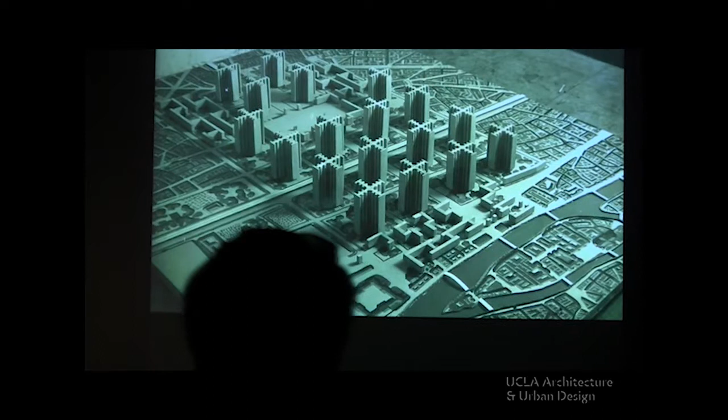This is a project made by Le Corbusier, very young, for Paris. It was a brutal proposal, super provocative, and an attempt to overpass the ideas Americans were dealing with in those days, trying to introduce some kind of rationality to the, let's say, unrational development of Chicago and New York and other cities. It was really a very young, almost fascist project—not a project, a beautiful one, but almost fascist in its brutal destruction of some of the most important areas of the old city of Paris.

I just want to contrast this with this other image, a sketch made by Le Corbusier 30 years later, in his maturity, when he became more interested in exploring the idea of interior space, and exploring the idea of excavating architecture instead of flying. In the first period of his life, he was obsessed with the object—the idea of, let's say, an assemblage, a Fordist production of the skyscraper, and the idea of floating in space with the pilotis, and all this almost tectonic development in the first part of his career.

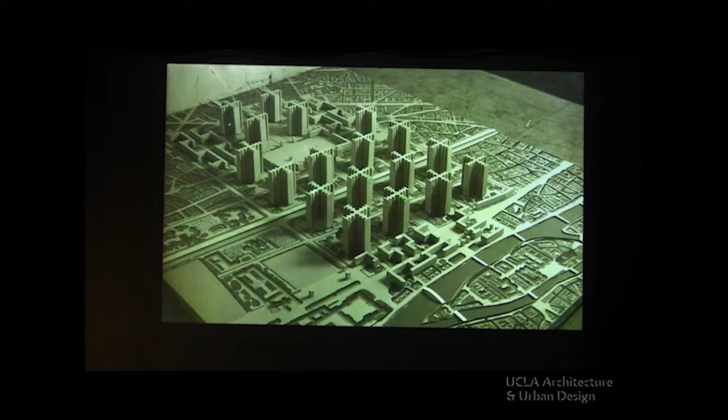From this moment on, he became more and more interested in the sculptural. He was very fascinated with the idea of dark interiors, organic materiality, concrete, the soleil, the brutalist use of concrete, etc. I mean, all of us know this story, but it's very clear, and it's something happening with many architects: they begin to fly, like Icarus, when they're young, wanting to make lighter things, and then at some moment they stop and begin to negotiate with the earth. This is just the first frame of the lecture.

The other frame concerns the texts I've been dealing with, some made with Renata, some translated into Spanish and English, some not, that in a way describe the trajectory we've been dealing with—analyzing modernism from three different perspectives. The Tower and Office book dealt with the technical heritage of modernity. The Good Life was more about the heritage of modernity in relation to private space, and the relationship between space and time, space and philosophy—how ideas affect the way we understand space, and the space of infinity. Atlas Pintoresco, which is not translated, was an attempt to deal with the idea of nature in relation to modernist projects. So these three books compose a kind of big survey of our heritage, and how we can deal with it from a cultural perspective that is more focused on the present and the future than on the past.

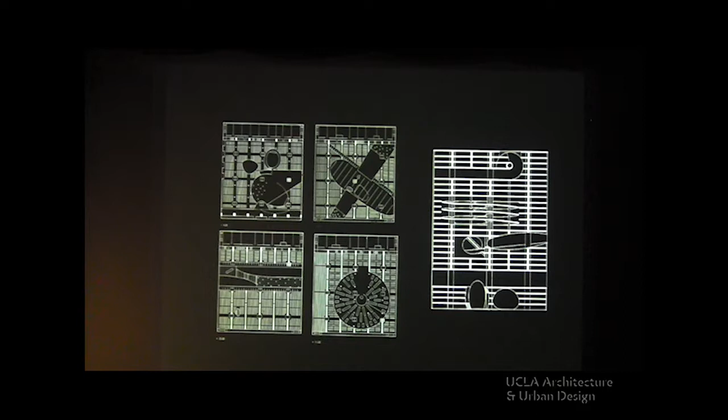With this, I just wanted to bring this discussion that at the same time introduces some tectonic ideas and aesthetic ideas. So I begin with the first project we made together, Renata and I - she will be speaking later, now it's my turn - and a competition that obviously we knew we were not going to win, and that we didn't believe had any sense to compete for winning.

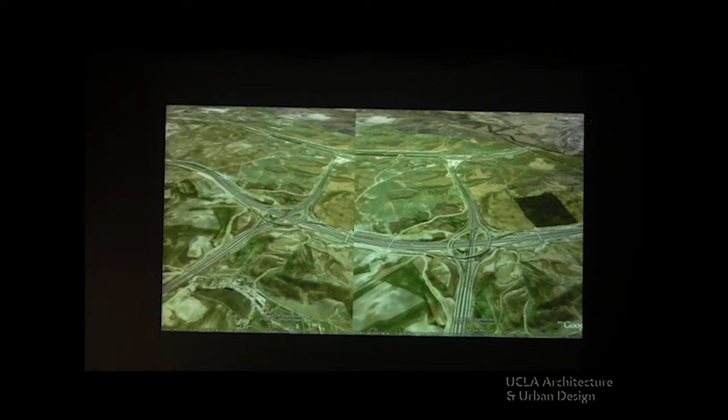It was in this unbelievable place in the surroundings of Madrid that has nothing at all, and they wanted to create a convention center and a hotel that could become an attraction for everyone. And we just began to work very intuitively, just for the pleasure of drawing, I would say.

With the idea of combining a set of very standard towers and a massive, let's say, elevated grotto - I don't know, excavated potato, I don't know exactly what. But we knew it had to be massive, and the other thing had to be fragile, crystalline. And in a way, there was a basic need to draw.

A very basic idea that thermodynamism, in a way, introduced a diversity of materiality into the project, in the sense that once you think in terms of energy, you always need some parts that collect or store heat gains, and other parts that capture energy and negotiate instantly with the climatic changes. So in a way it was a metaphor of a new materialism that combined the crystalline surface of the prism with the organic potato thing.

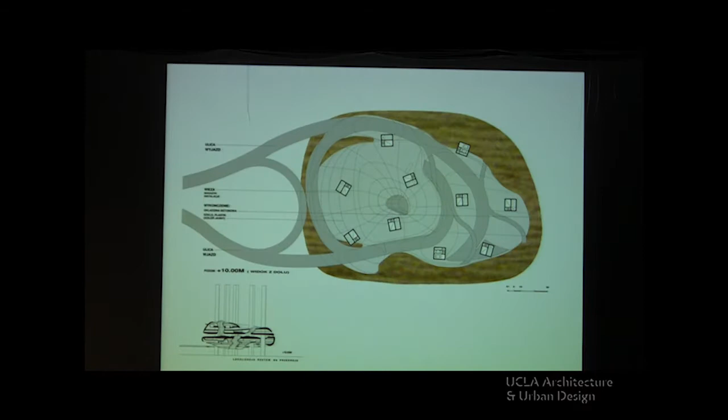And then here, without any idea of the picturesque, the growth, etc., just for fun, we began to think and to draw this. I will run it as in a flipbook in different ways.

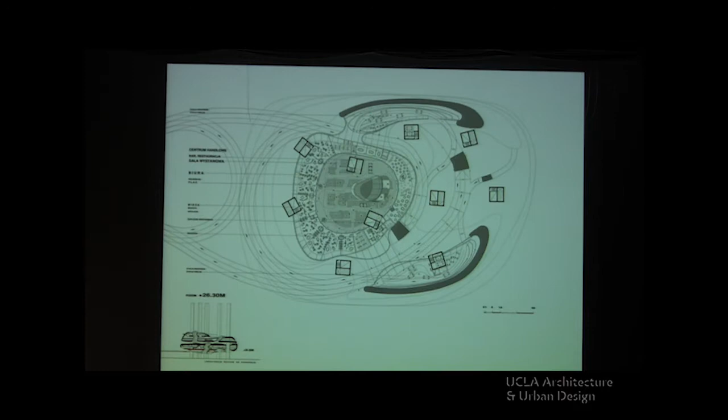Obviously the access was by car, and then there was a kind of labyrinth of movement and a kind of ballet, choreography, where you could find some cultural centers, some leisure centers, car park, obviously, some archives, cinemas, and then in the middle of the potato shape we had a real park that collected sand and water and had a kind of connection, an outlook space, a connection with the surroundings.

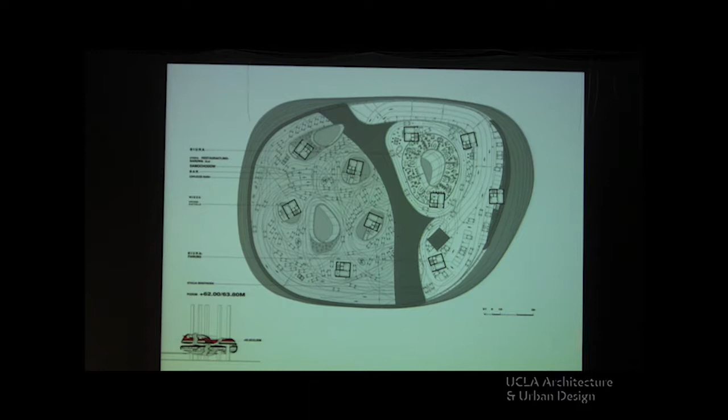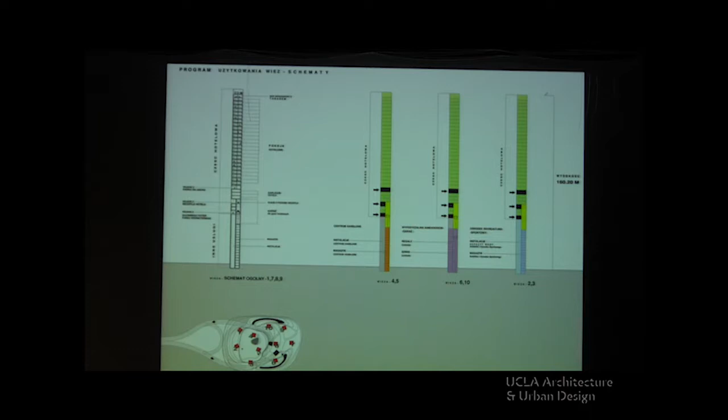And then we jumped into the upper part. More cars, more buildings, more cars, more potato. There was obviously a tectonic, complementary relationship. The towers were supporting, and the towers had just one room every floor. The lower part was for storing different materials, and the upper were the rooms, done carefully, trying to extract the most pleasant spaces for just one room in a very small space.

And that's it. This is our first project.

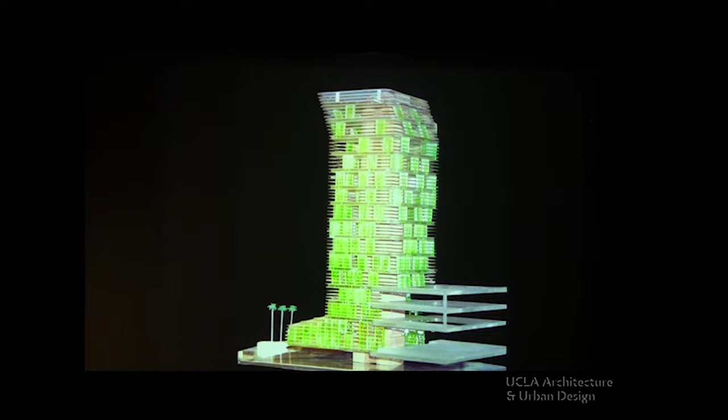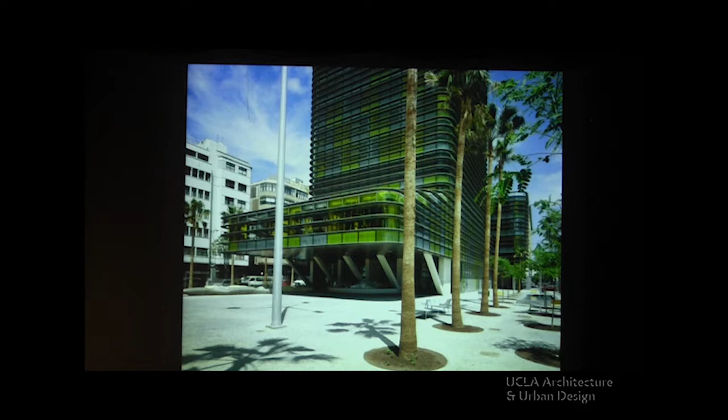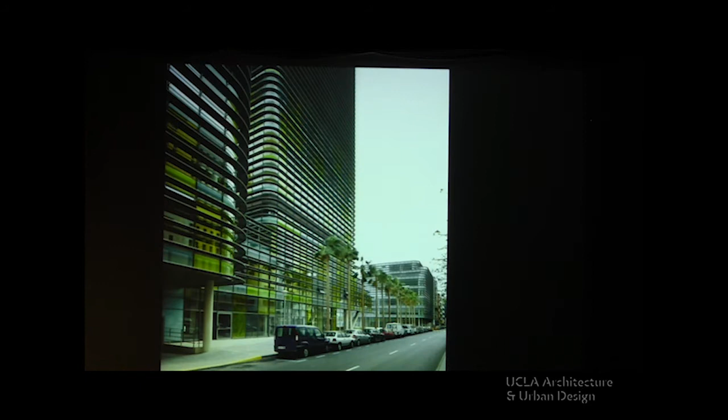Then we had the opportunity at Ábalos and Herreros, as Renata was an associate there from the first year, to draw some fragments of this idea, like this tower that was a kind of mixed use, that negotiated with the urban real built in Canary Islands, a combination of different programs, but at the same time wanted to jump and relate itself with the surrounding volcanoes, not with the surrounding urban fabric, but with a more topographical or geographical relationship. I mean, to hide the real scale into a super redundant display that changes the scale of the surfaces and negotiated with sand with this kind of scaleless device.

Here you can see more or less this relationship with the beautiful surroundings. And this other that at least we could experiment.

It was a public housing competition we won, built in Vitoria in the north of Spain, in very cold weather - it's the Spanish Chicago. We were in front of an even more frozen scenario, a kind of swamp with water and a protected landscape that we could experiment with, pivoting our slabs and creating special effects, extending the water as our landscape of the plot, duplicating like Narcissus.

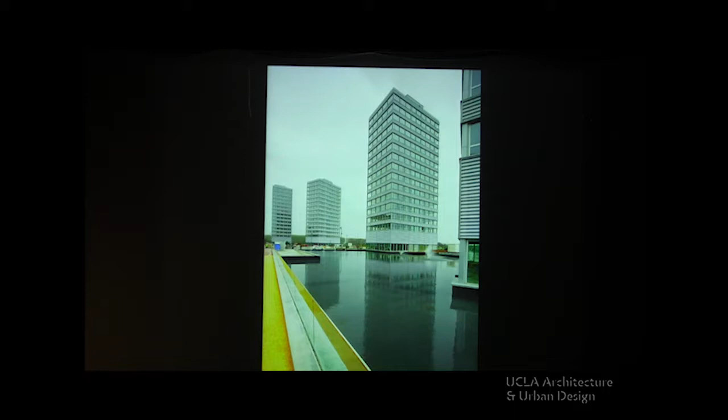The scale of the very simple towers. This is an example. A very basic construction system.

And then we began, a couple of years later, to experiment in a more technical way with these ideas, but this is the turn of Renata. Please, Renata.

I will try to follow smoothly after Iñaki.

This is a project in Paris. It was related to a political project of Sarkozy called Grand Paris, to make a new metro line surrounding Paris and connecting all kinds of suburbs. So it was a moment to investigate what the future station of the metro could be.

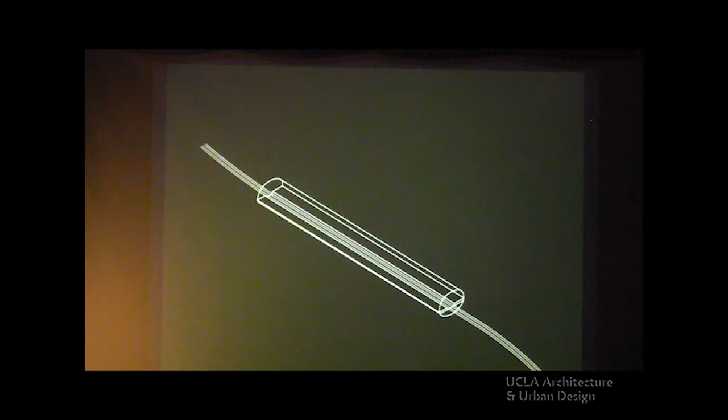This is a very simple first drawing, so we start just from the beginning. This is just the platform. But the moment we think about what kind of new public space the metro could be, we start to investigate if this public space could deform, could go up, could cross the line of the ground and grow up as a building. So this is a very simple exercise.

We could see the same kind of tube became a kind of patio, a kind of void that perforates the building. These are our first sketches of how the building could look, how the underground and overground space could intersect, and how this public vertical space could relate at the same time with the infrastructure and with the public program above.

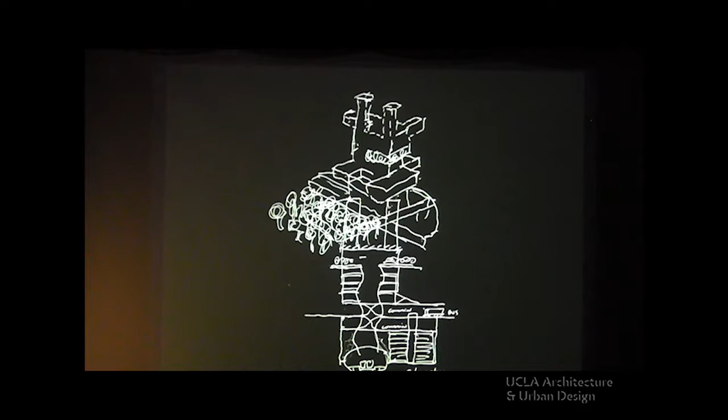So we start to play with the space going up. This is important data too - we're working with a new system of metro, so the train is enclosed in a kind of glass tube, so there's no pollution, no noise. At that moment, this public space, this air, can be used in a very different way.

We collaborate with designer Jasper Morrison, who you know perfectly I guess, who brings this kind of relation with historical ceramic elements in the ground space. He was working on the part which is much more touchable, like the first kind of layer. And these elements we start to bring up, going up into the building, changing the form.

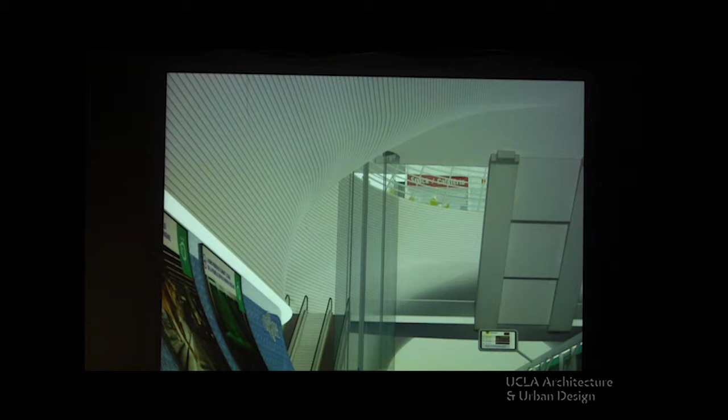This is still ceramic - you see these are kind of ceramic lattices, white, but they can deform and follow this more complex geometry which is going up. At the same time, they can be more near and more farther to each other, so the relation with the light, getting it in, and reflection of the light could be more complex. This is our first kind of geometry we're working with.

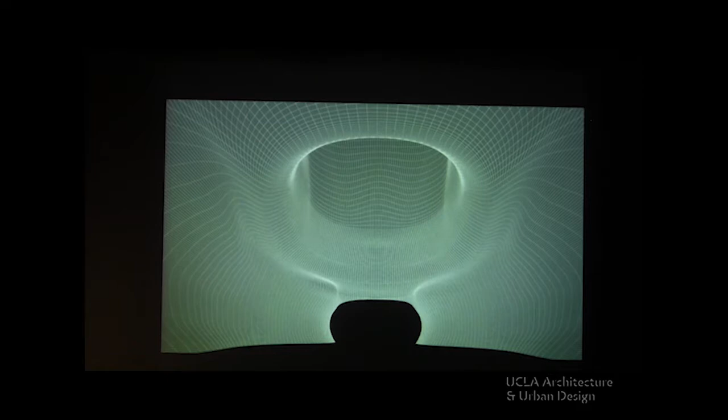And how it could go up. These are just a sequence of axonometrics of different floors. You can see this is a public space which is completely open, where different kinds of activities can happen. And it perforates through different elements which are communication voids.

And up we put the building after explaining this very specific form. Here you can see what we were thinking, that this could be like an icon. So the new metro station will bring a new public space that can become a significant place for meeting people. This is an abstract kind of geometry of this suburb town.

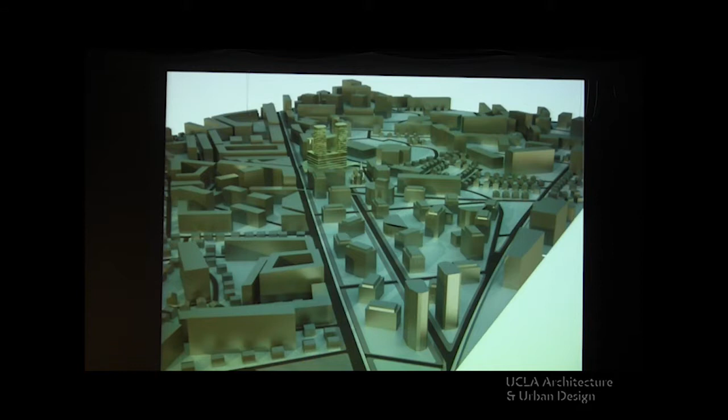So what we wanted to play with is the same height. This is the basic, more massive volume. But once we go over the line of surrounding architecture, we play with these towers that became iconic and became a sign in the urban space.

Here you could start to see the section. You see how the void of the metro goes up and turns and surrounds, surrounded through a cultural program. This is kind of public library, kind of dia shop, you could say.

And all kinds of devices of transportation. There are electric cars, buses, bicycles, etc. And over the towers, there are dwellings and offices.

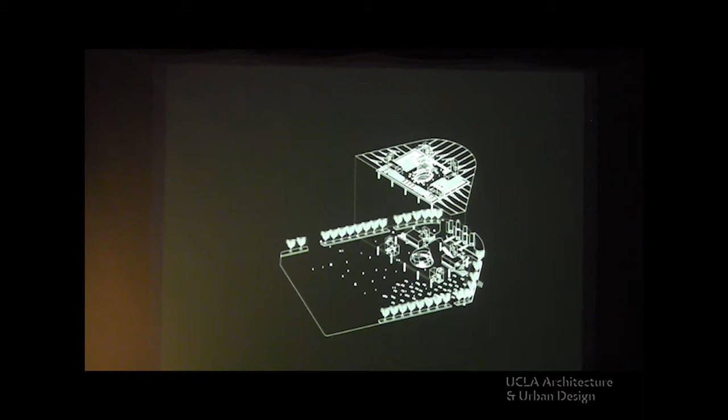Go fastly through different floors, just to see how it's constructed one by one. This is the first materiality of that, how it could look like. The space up, the interaction directly with the infrastructure.

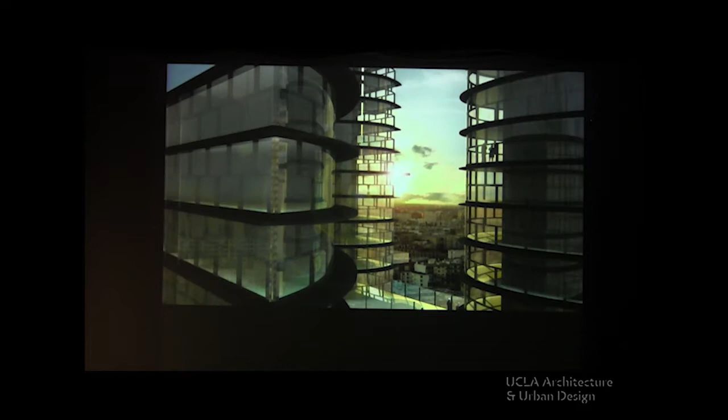And these are some schemes which are quite important. This one, the second one I will show now, is when we start to think what kind of character this space could have. Here we are thinking about natural light, how we can bring it inside. It's not to get really natural lighting, of course—it's quite impossible—but you can have glimpses of natural light, so that the character of light changes between the morning, midday, and the afternoon.

So this is what's the name of? Heliostat, yeah. This is the heliostat that captures the light. You can see in the schemes for these towers the form to get the light in three moments of the day, which is when there's a higher use of the metro—in the morning, midday, and in the evening. So we bring these different colors or tones of light into the space.

And this section is a bit unsharp, but I will explain it. So in this project, we started to think about this idea after we developed it at the university. I will show some works of students, on what kind of potentiality the infrastructure can have at this kind of public space.

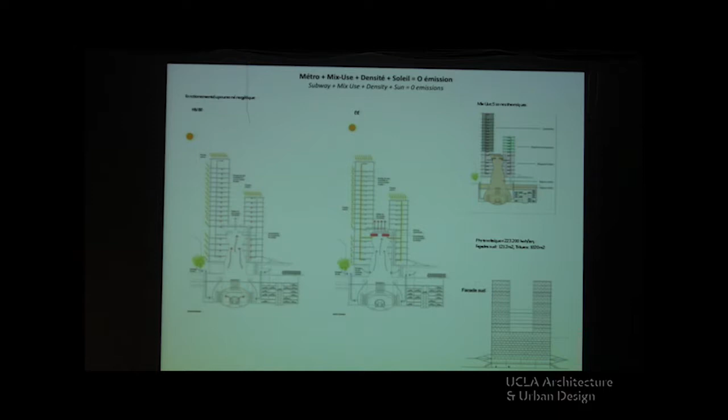There are some images, of course, with the Eiffel Tower view. And here I bring some examples of how far we got with this idea of exchange of energy, and how far we tried to introduce a kind of thermodynamic protocol into academy, into the process of design, to work with the students, but also to find a way how we could work with thermodynamics from really the beginning of the design process.

Normally we are used to very complex kinds of software where you can check your building, how it's working. But what happens with this software is that you can check it once the building is made, but you can't interact with it. So we're trying to think how we can work with thermodynamics in a more analogic way, we could say, a more direct and more interactive way.

So these are some works of students when we start to introduce kind of protocol. The important thing was that clearly we cannot deal with thermodynamics all at the same time because it's too complex.

So we need to divide it into smaller questions and go one by one, trying to answer independently. Once we have all these different answers, we can join them together, what we call assemblage of monsters. This is the specific moment when all this data from different research gets together and becomes kind of the beginning of a project, even though they are still not architecture.

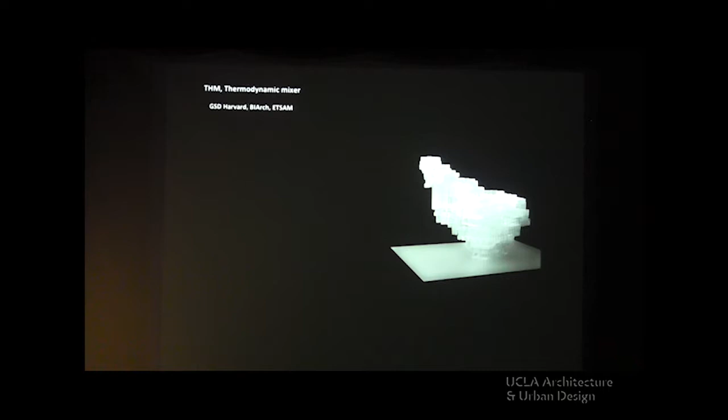So you have here one example. But at the beginning of the process, what was important, if we want to work with thermodynamics, we need to understand the grammar of it. What does grammar mean? Grammar if we talk about lexicon and if we talk about graphics also. Both things we think are equally important.

So these are just basic processes of transmission of heat: conduction, convection, and radiation, as you can see here. So the first element was to study them to understand how we can use them inside of an architectural discipline. These are very specific, very different configurations where we can play with red and white, the heat and cold elements, to try to find exchange between them.

And these are like first studies, research about what these three processes, convection, conduction, and radiation are. What it means - this is important like a physics kind of function, we could say, but we are talking about geometry, we are talking about distance, we are talking about time. So directly there is a relation between the space and the geometry, how the energy moves in each of these processes.

But also there is a direct relation with the human body. Iñaki mentioned before, finally the architecture we are making is for the people. So the person could be the starting point. So what is the relation between space, between radiation, convection, and conduction when we talk about the human body.

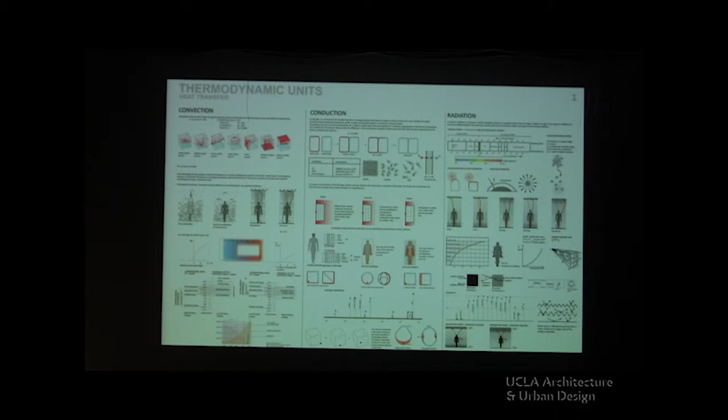So this was another important element. We were studying a very simple unit, just a 4 by 4 by 4 meter cube. If we have this form, how should this form change to optimize each of these processes - convection, conduction, and radiation. And oppositely, how should this form deformate to stop this process.

So these two geometries, or balance on both sides, start to give us kind of first glimpses to understand the relation between the geometry of space and the thermal process. We have some examples, I will not go deeper into it.

This was one of the questions we were trying to answer. This has very direct relation with the project in Paris. When we talk about the use, about the program, how we can understand it in the thermodynamic way. So we could divide all the uses into groups: they are producers and absorbers.

This is a very simple Excel chart where in the first column you have what each use needs. Of course all of them need very similar heat at the beginning, but once they become active, when they have activity of humans, so you have human radiation, lighting, machines, computers, etc. When you start to make this balance, finally some of the uses still produce energy, so basically they need to dissipate - their character is like producers. And the other ones still need to absorb. So final numbers, they are positive and negative.

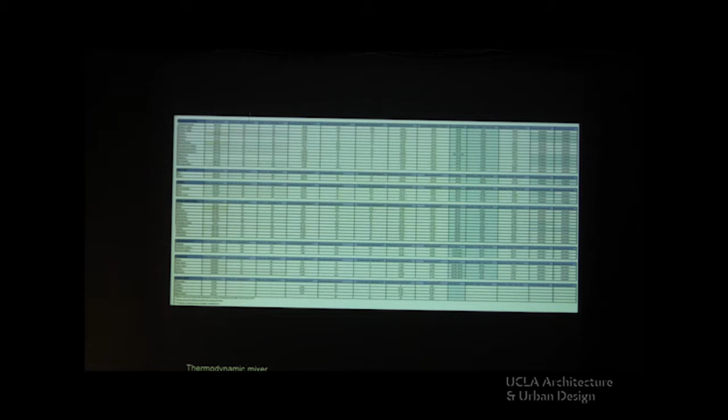So this chart here is translated to a graphic through 24 hours. We have values per hour, so you could see how each program performs along the day - it produces, it absorbs energy.

Once we have all of them, this was studied in Madrid and Barcelona, so just to have these two different climates - more coast and more interior, kind of more humid, more dry.

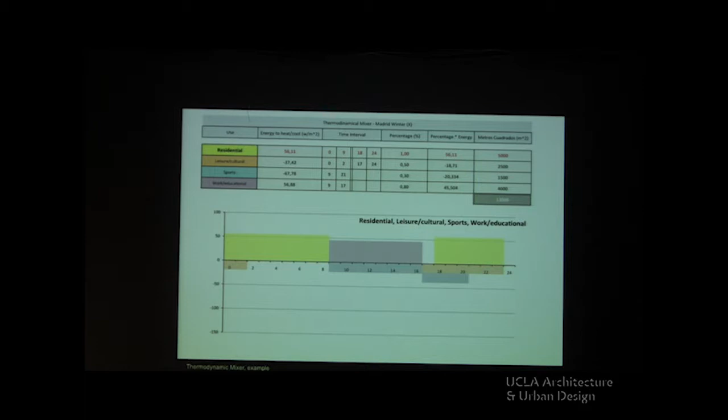Here it's first trying to balance it. Basically what should happen is that the produced energy up and down should be the same. But this is divided over 24 hours, so we're talking about the surface of it - the up surface and down surface should be the same. Here it's the exchanges along all the day. Mostly what happens is that the up part becomes active, producing during the day, and during the night you need to absorb. So it's unbalanced during 24 hours.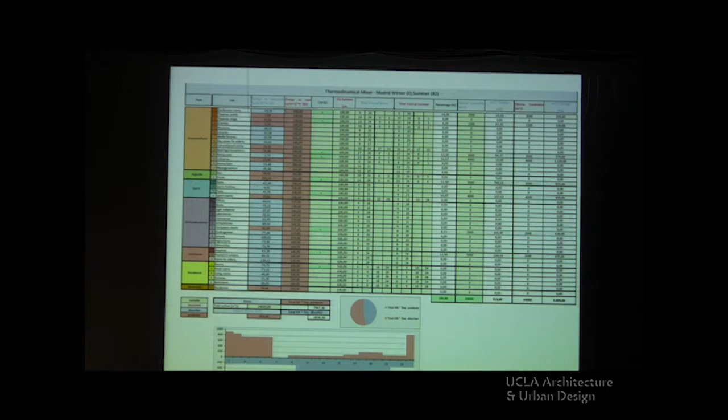So this is a kind of device we are working on, how we could have a very easy and very fast answer as an architect to understand what happens with the building when we have this quantity of square meters in different programs, when we start to mix them. So this became much more complex.

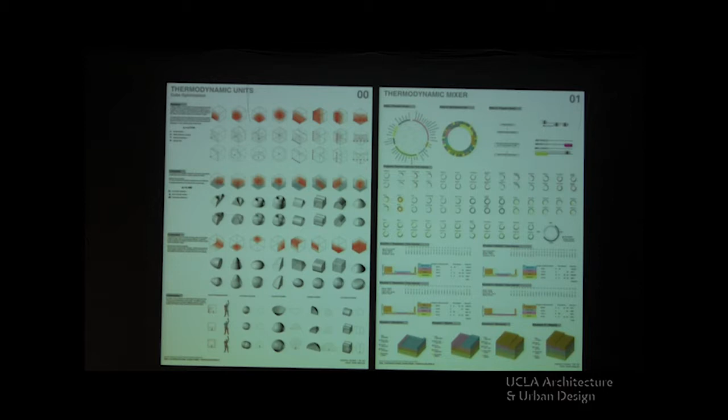Here are some projects that show different steps in all the process. There are like units - first, what we call the thermodynamic mixer, when students start to balance different programs and try to find the composition. So you just have square meters or cubic meters in it.

And after, you put this cube, we could say still abstract, into the specific climate. So you start to understand what kind of climate you have and what kind of potentialities you get in it, and you start to deform your cube. This is also a completely independent question - what's going on with this form when we think uniquely about exterior relation?

So the important thing is to understand what the climate means. As architects, we are trying always to do a bit of everything, which is completely unproductive. So the important thing is to understand what the main source is.

So if we talk about the climate, we were asking students to do what we call listing and ranking. First they have to define what kind of devices, what kind of potentialities, positive and negative, they have in the place - could be positive as sun radiation in winter, but negative in summer. But once they have all this list, they should put a kind of ranking, like 5 stars - what's the most important and strongest element to deform the form?

Because if you have different deformations, they overlap. So we have to know which is the most important deformation in all the process.

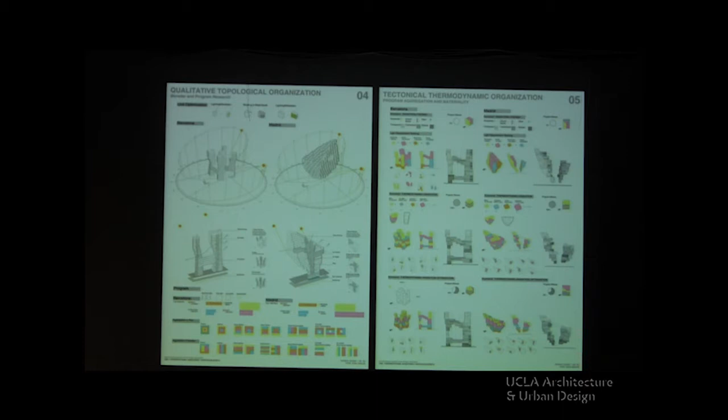Here are these different steps - I'll go faster. So you could start to see how this mixer starts to work, getting into the inside of the building. On the left down, you could see all possible configurations about absorbers and producers, how they should be organized inside of the buildings, what kind of organization it is. And these are like first attempts at a kind of materiality it could have.

This is another example.

This, for instance, is clearly the 5 stars in the ranking of climate - it's wind. So you could see how the form tries to capture the wind to get ventilation, natural ventilation through it. This is Barcelona and Madrid.

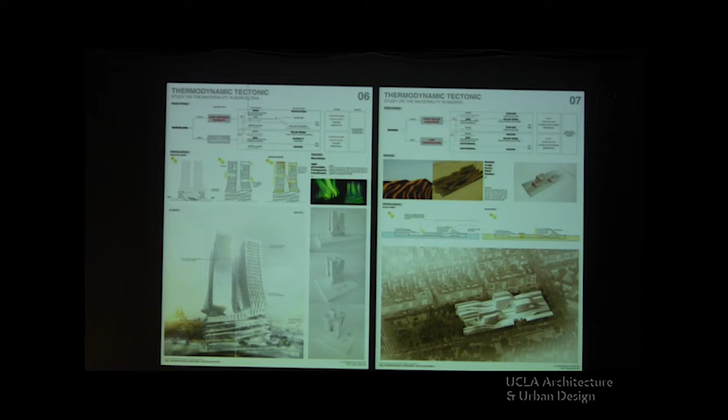And here I pass. Okay, and then the last thing of these samples is the experimentation with a kind of new materiality and new ways to deal with air and conductivity inside materials, conductivity, etc. So I will not explain them.

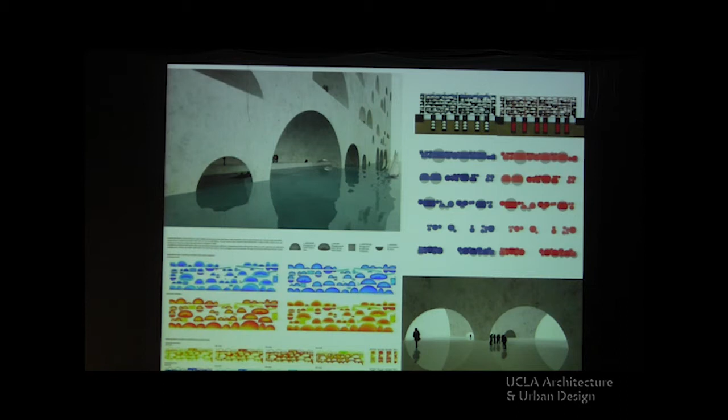I think that the production of new images - some of them not that new, completely passive, almost historical - has been an interesting thing for us. Which kind of monsters this kind of organization of our knowledge and our approach to the market and to the public can produce.

This is nice because we suspended the gravitation at all during these terms, so no one had to deal with gravitational forces, just with thermodynamic flows.

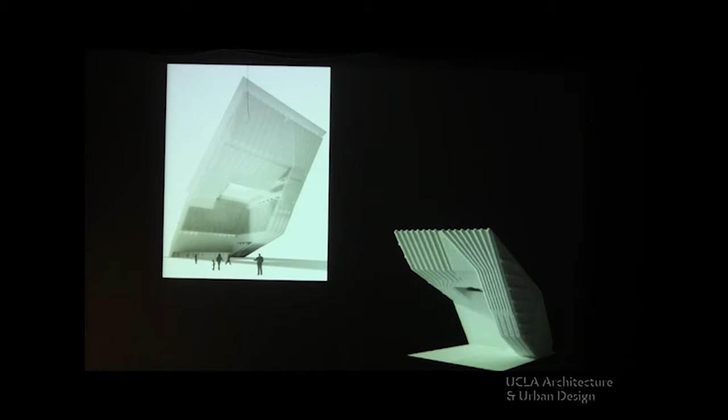And this is a project we were doing at the same time, a mixed-use project in Torino, a beautiful place as everyone knows, a wonderful city close to the Alps, and one of 3 skyscrapers - small skyscrapers, 120 meters tall - that they are dealing with.

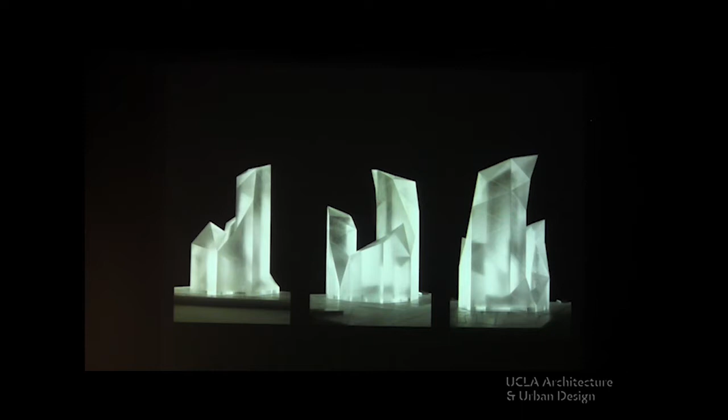So the idea for us was to combine different uses in a kind of rocky organization that is not just metaphorical, it's structural, because this triangular shape has a tectonic role, but at the same time it casts, through this organization, shadow on parts of the program that don't need to deal with sun directly, like office space.

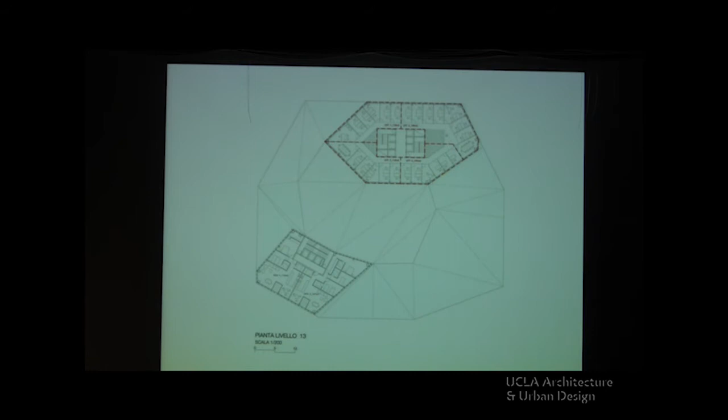So it's a kind of passive negotiation among different programs that wrap the whole building or the whole entity, and at the same time those facets that have more sun exposure will become like photovoltaic collectors of heat.

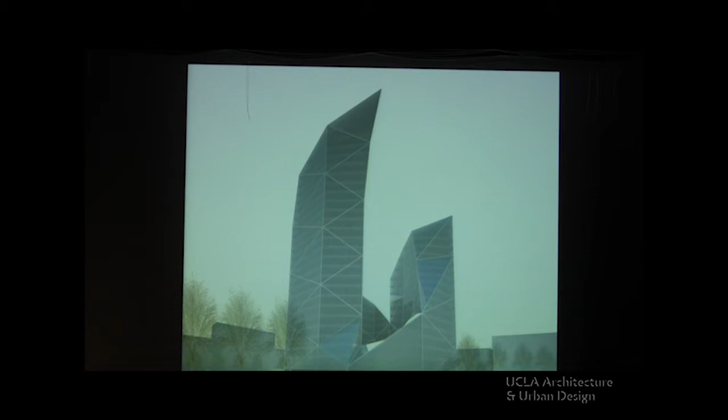And it was just an exercise that was unfortunately second prize. We are very much used to second prizes.

This was first, in Logroño. Another has some similarities - again the cave or the grotto was central. It was about creating a new urban development using the change to the high-speed train in Logroño.

In Spain, this is the pre-existing thing, the path that the now underground tracks will follow in the city. So we understood immediately we had the possibility of creating a kind of green belt in the city, and that it was a political issue. This was the reason why we won.

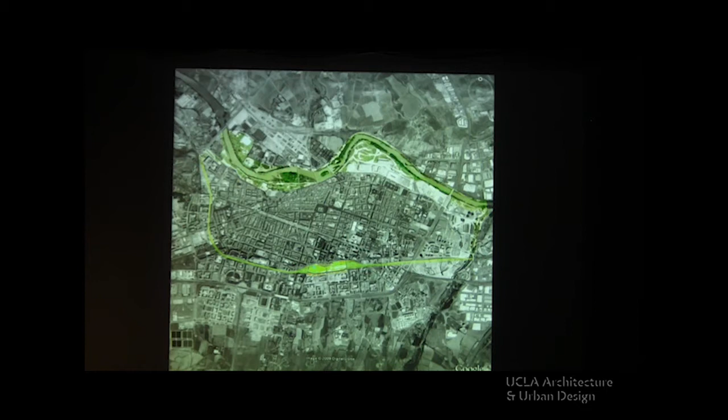We didn't design the station, we designed a kind of slope that allowed everyone continuity in its green path, with small towers around expanding the slope, which has two sides - a garden and a station. So here again we have a combination of towers and an organic shape. In this case the organic shape is not floating in the air as it was 15 years ago - it was more realistic. Probably this is why we won the competition.

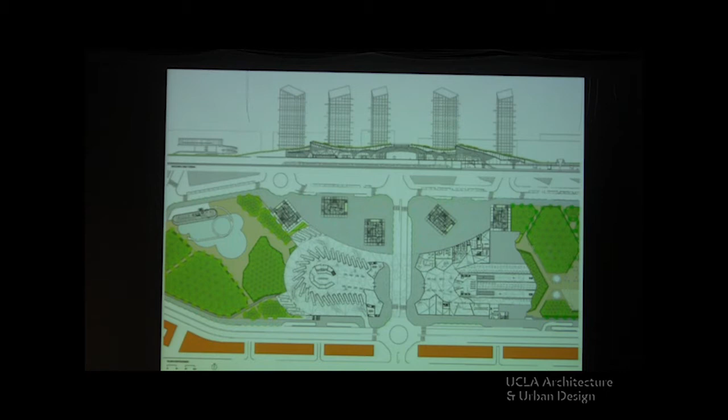The whole thing had these two sides, up and down, sharing the same triangular geometry, which is tectonic but also gave us the possibility of dealing with a very difficult geometry, because the tracks make some strange, bizarre figures underground. So we couldn't have a kind of regular hypostyle room - it had to be irregular.

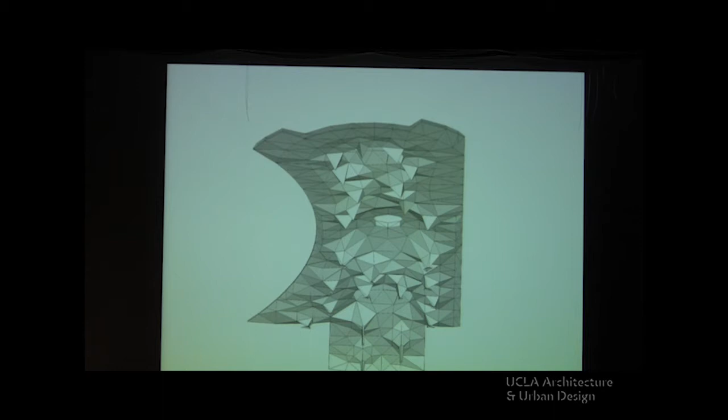Here you see it under construction. On top of this, the whole structure is a part that will be open in one month when we come back to Spain. These are the skylights for the platforms of the train, and this is the train station.

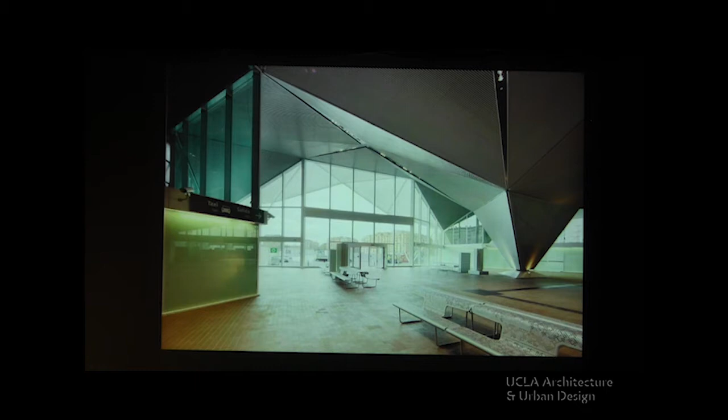The train station is made with very simple materials, using a combination of aluminum lattices, extruded lattices that sometimes are transparent, and depending on how you move they become transparent and show you all the tectonic efforts, but at the same time can become opaque, and ceramic tiles that have different degrees of polishment.

So everything is activated through the movement of people. It's not a kind of static place. This is the place where you go down to the platforms.

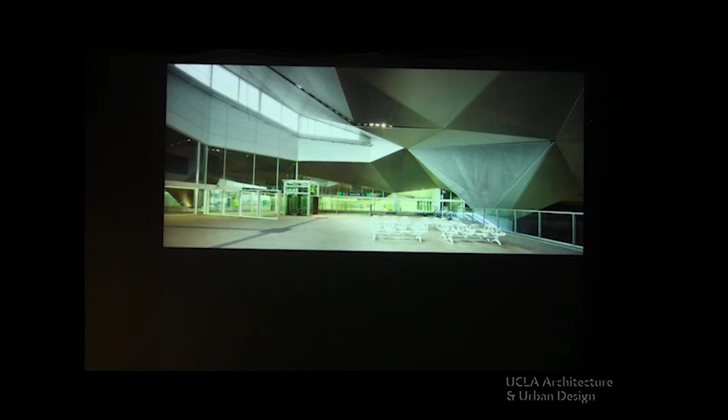This is the area of the train - it is huge, 400 meters long. The skylights with these kaleidoscopic mirrors introduce some light and patterns, not repeated patterns, but an ornamental way to distribute light instead of glaring blue.

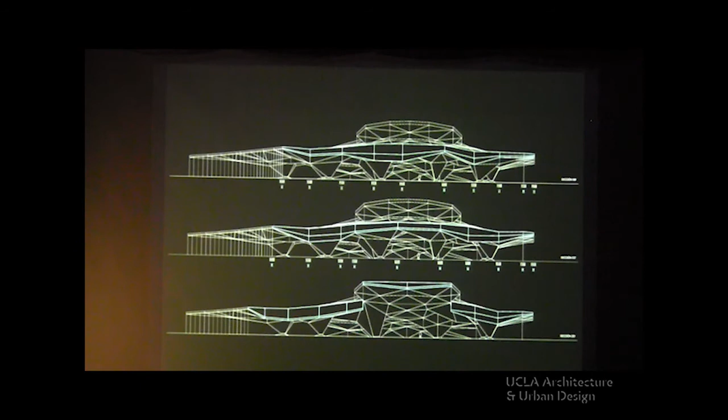These are very important drawings, because they were the mediators among all the specialists, engineers, all the staff. It was a kind of pact, a consensus drawing. Everyone had to respect these lines, and it took a lot of time to draw them.

This is the layout - you see the columns, never more than 20 meters of span, but at the same time the position is irregular, and they give way to this kind of unfolding of the geometry, which I'm not going to explain.

This kind of contrast among the phase of construction and the finishing.

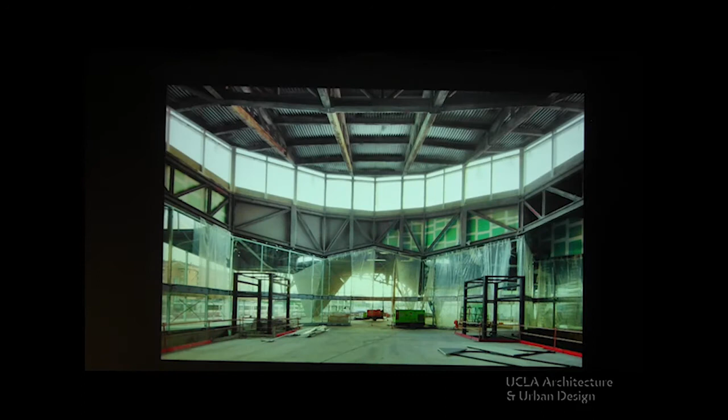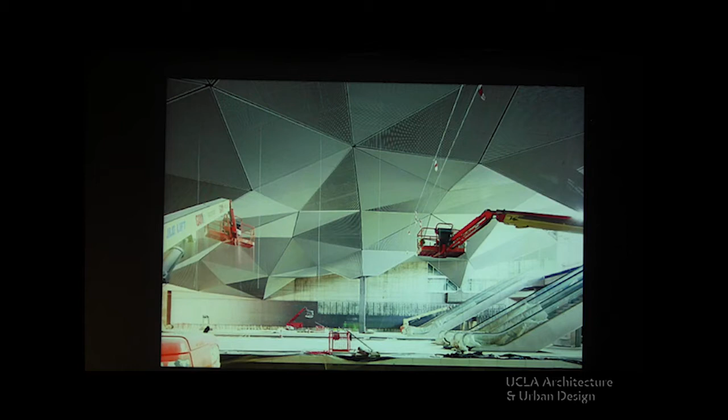The whole idea of the space was to create a grotto. It doesn't need to be said, but at the same time deal with the idea of our body in movement. You always are in movement when you come and go up and down in the station, and instead of just the simplicity of an extruded section, which is the typical way stations are designed, we wanted to create a complete experience.

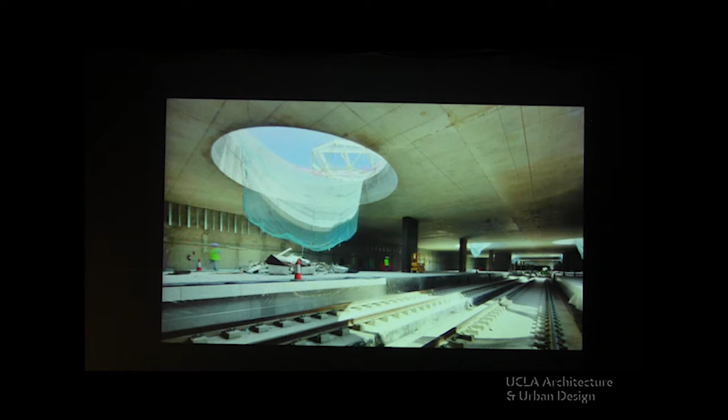All these products are commercial. The only thing is the geometry needed more digital tools, but the price was exactly the same - a little bit more, like a percent more than if it was just rectangular or flat materials.

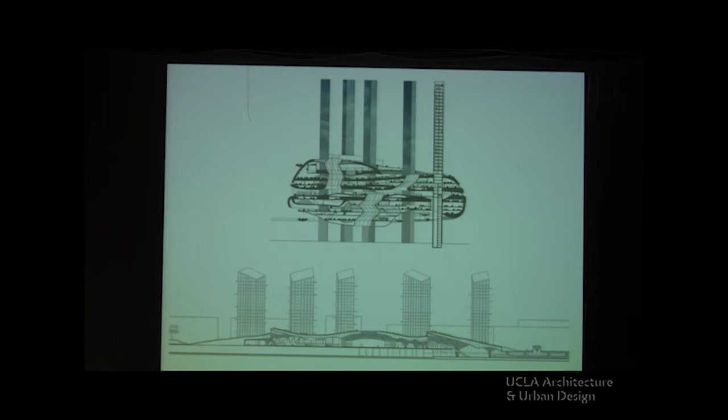We made this like one month ago, a comparison of the scales. We suddenly thought, what happens if we just put them together, and it was amazing. We were amazed - in 15 years we didn't realize we were dealing with the same idea. And then the second idea we have, because we don't have that many ideas - every morning we have only zero ideas.

Maybe 1 in 5 or 6 years.

This is another idea to deal with high-rises: the solution of the compact shape when you lift up the section. It's a transformation from a compact building into a kind of bundle of towers. We've dealt with this in 2 or 3 projects. This idea was an homage to a Spanish architect, Oiza, who made one of the 2 most beautiful skyscrapers of Spain—one completely compact, and the other, the Torres Blancas, white towers, very similar to Marina Towers in Chicago. So we began to think: what happens if we make a transformation from bottom to top that begins as a compact building and transforms into a bundle of towers?

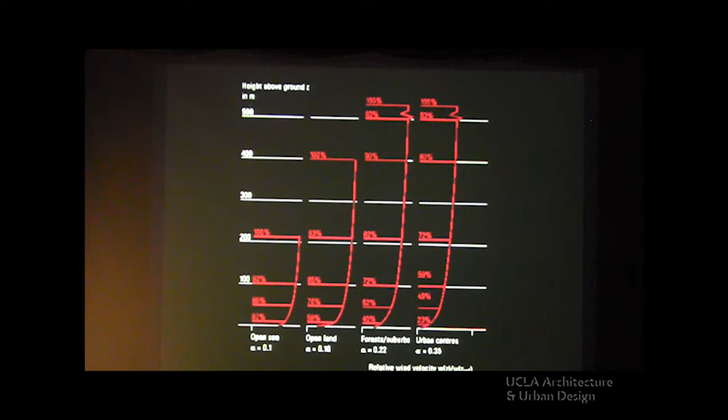We discovered this had structural, aesthetical, and thermodynamic implications. Structurally, it's obvious the wind increases in speed as you go taller—everyone dealing with skyscrapers knows this. The idea of turbulence, and avoiding sharp cuts, reduces turbulence and negative pressure, reducing the tectonic impact on skyscrapers and the consumption of steel. The change in section also changes the period of oscillation, so one part contrasts the other, and you don't feel what's called the jerk—the acceleration of speed that creates an uneasy sensation in your body.

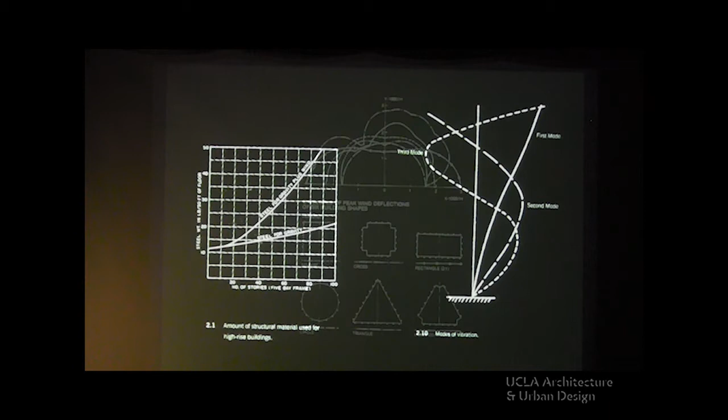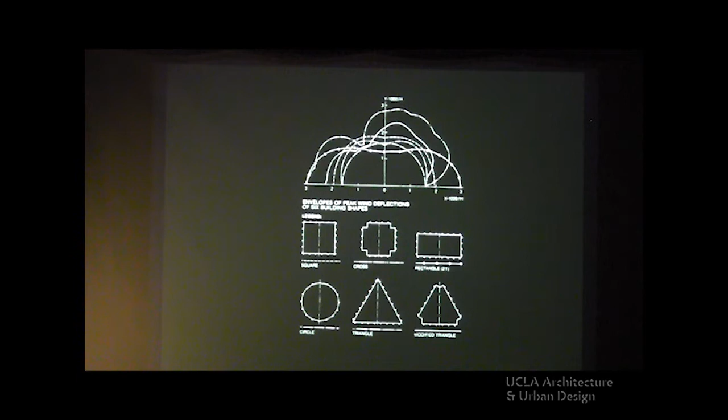At the same time, these are very old schemes, from before digital simulation—made in the 80s, testing different shapes in wind tunnels. Obviously, the cylinder, or shapes without sharp edge corners, have better performance. This was an homage to our grandfather, a very beautiful project.

This is what we began to deal with in Paris, when a group of architects was asked to bring back to Paris the idea of a high-rise as an interesting possibility to live in. We had different sites. Ours was fantastic—it's a horrible mess of infrastructures, but we're used to dealing with that. It was beautiful historically: it's the periphery, crossed by the Roman path connecting Notre Dame and Saint Denis. So it's a Roman axis in a mess, a labyrinth of cemeteries, stations, warehouses, etc.

We wanted to work from the very beginning with a kind of ambiguous status, knowing that the Montparnasse Tower and others are hated by Parisians. So we decided to work with the topography and with wind. The first thing was the rose of wind, how it affects the structure, and the topography. We didn't want to be in the city—we have Montmartre and the Buttes Chaumont to the right, two kinds of mountains, and we're in the middle, in the valley.

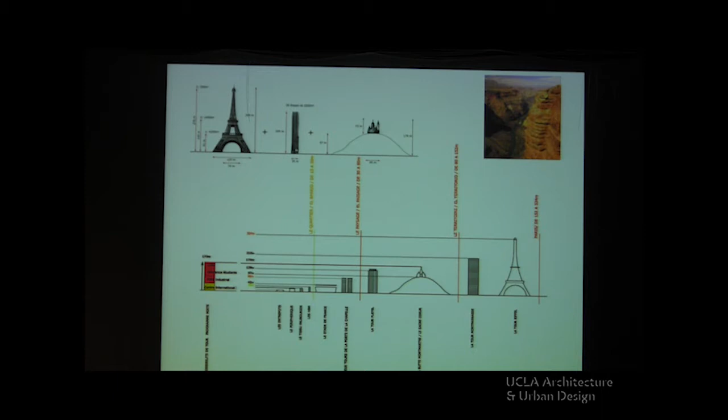We began to test the height against other high-rises or similar structures in Paris. We decided that since we were so close to Montmartre, this combination of a natural height with domes was interesting for us. We made the transformation from compact to bundle of towers—it's very clear in the second drawing, on the right side—and how a smooth transformation would bring a kind of topographical or ambiguous status to our project.

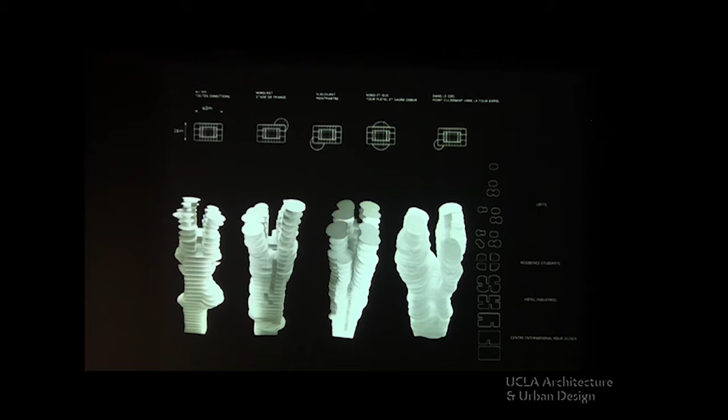Some very simple models tested the possibility of cantilevering more or less, and how to deal with this. This is again a kind of internal stomach, coming to the lower part of the tower, with a public program. We discovered we were on a site where the urban plan wanted a university campus, and we decided it was a wonderful idea—exactly because of this thermomixer principle, the combination of different activities during the cycle of the day would bring a kind of internal neutral autonomy in terms of energy.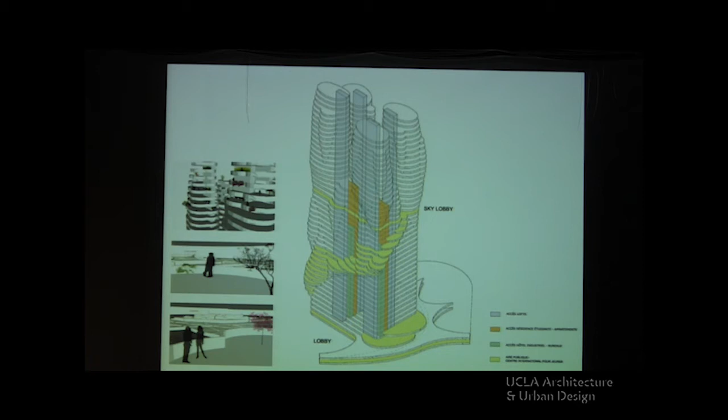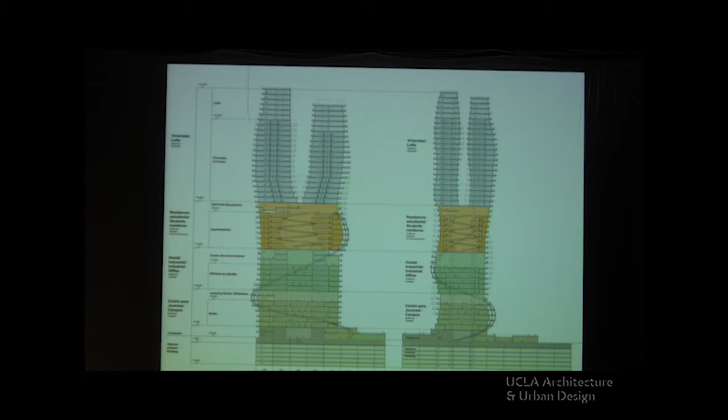So it's a combination of an iconic—I'd say a very iconic—take on the idea of a high-rise, but at the same time it has a performance based on combining different activities. And, very simply, from the point of view of tectonics, a very simple structure.

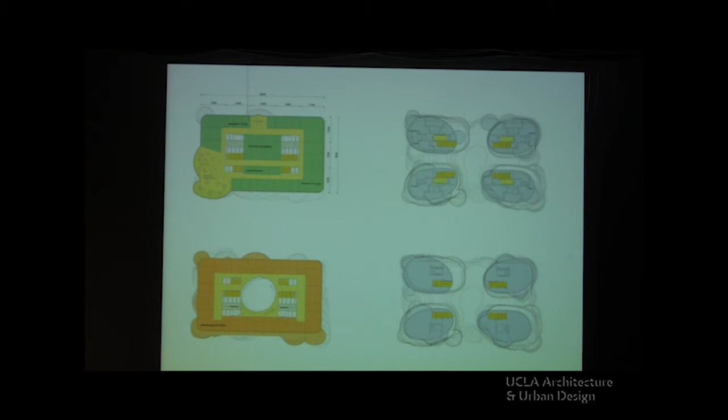It splits into 4 towers, or 2 pairs—it has in mind the heritage of the other metro project, but develops it further with a clear, simple geometrical game that respects all the rules of thermodynamism and all the structural rules that can be respected.

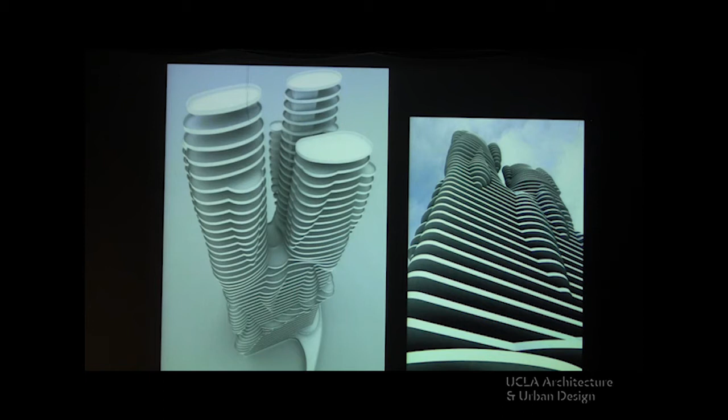At the same time, with the same sketch, the same Frankenstein, we were dealing with a social housing project in Valencia, a completely different context. Valencia is much more Mediterranean and sunny, and social housing is not a campus.

But we were interested in this concentration of ornament at the top as a key part of the drawing—the idea that you can concentrate all the complexities in just the upper part, which is obviously in La Giralda of Spain, and also the La Giralda of McKim, Mead and White in Madison Square Garden, which was the key element in almost every deco skyscraper in the States. The concentration of ornament and variation happens in the areas your gaze naturally goes, somatically, I would say.

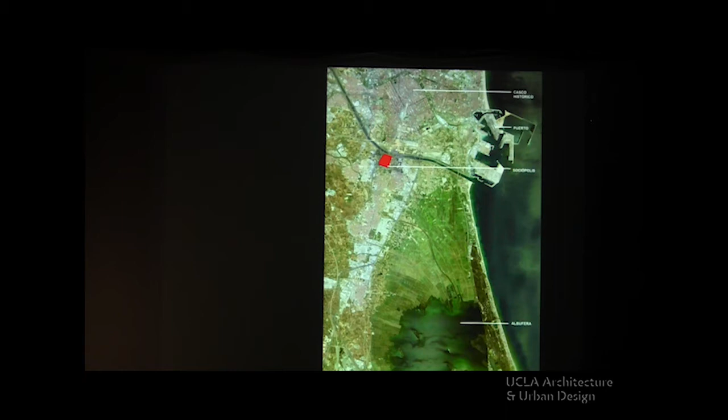This is Valencia, the port, the Mediterranean Sea, the Albufera Lake, and the red area is a neighborhood called Sociopolis, which is a new neighborhood. These were the first drawings.

This is a model that obviously doesn't have the complexity of social housing—you have to deal with a very little budget, everywhere in the world, and Spain is no different. But we could really concentrate on this and try to extract an identity, forgetting all the moralism implicit in Europe regarding social housing, that it has to be straight, simple, serious, boring. We tried instead to give a kind of dignity—the dignity of saying 'I live there.'

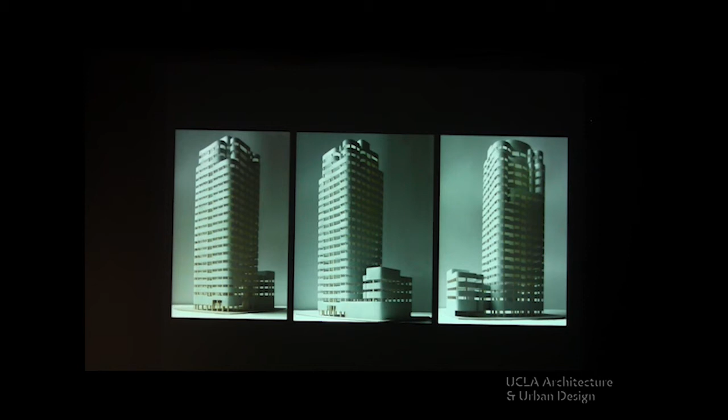It's also not just a figural thing, it's about trying to establish variation within a kind of repetitive pattern. So we ended up with 22 different apartment types.

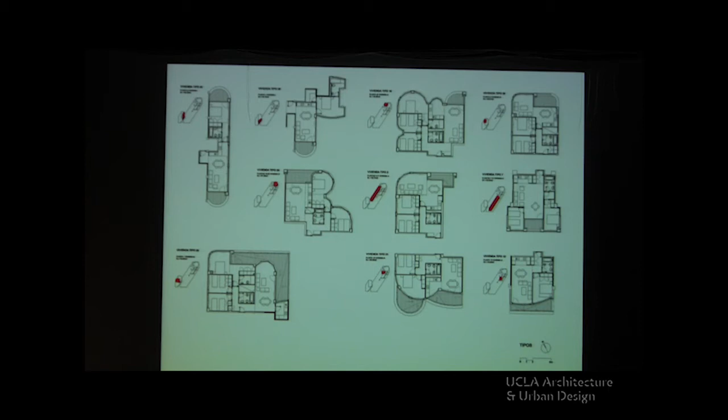It's been an amazing success, especially given the critical financial situation in Spain. Everyone has been sold out immediately.

This is the construction techniques, and the effect on the area, which still has farmlands, and how it becomes—supposedly—part of a neighborhood.

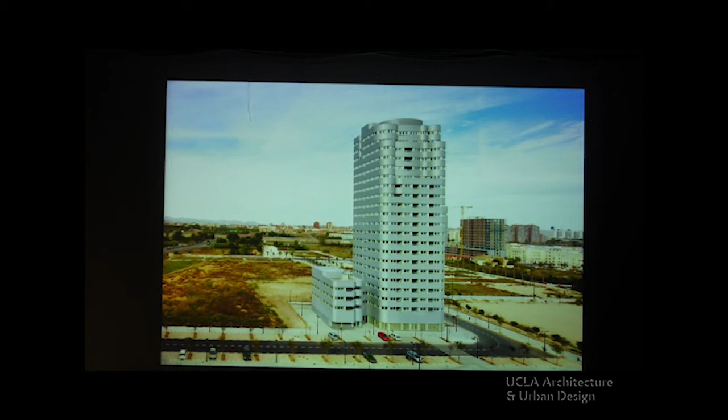The lower building tries to establish a negotiation with a building that hopefully will come to the left side at the end. But it's the only one that has been finished because of this crisis. We hope all these things will be solved soon, hopefully.

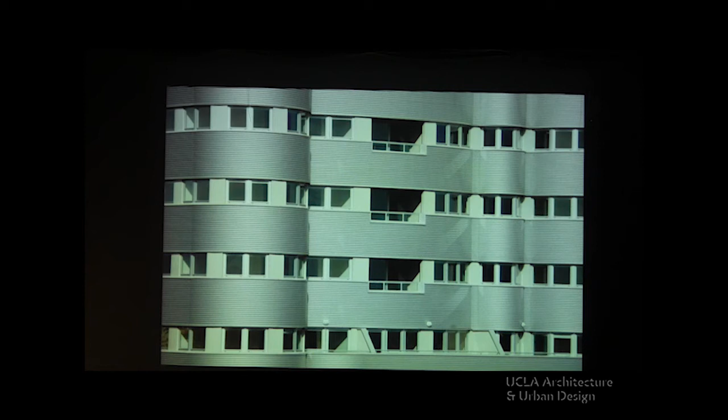This is an aluminum sheet that reflects the radiation and allows us to negotiate the sun well. We began with a client who didn't care at all about sustainable issues, and we convinced them to make changes without changing the budget. Now they've received a huge amount of money from the government because they have the highest qualification in the whole east area of Spain.

I'm not going to explain all this, but there are all these LEED metrics—I'm not interested in them at all, but at the same time they're a good resource to bring clients into some kind of consciousness and let them play a role in some cases.

This is social housing, and this can be shown. I don't say it's a wonderful thing, but it's not that easy to show the theory of social housing in practice.

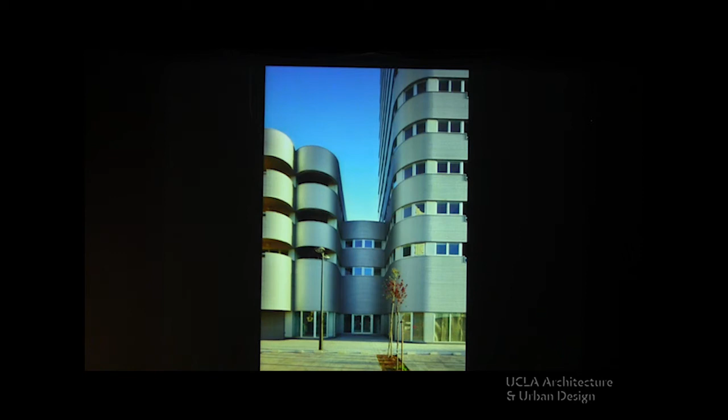The access is in between these two volumes that really narrow it by the pressure and the containment of form.

With this image, I think you have enough of our ideas. I've been trying to explain these ideas of somatism—which kind of things can be brought into discussion to develop the typology of the skyscraper and the high-rise, so to say—and also the idea of materialism that can be more complex than those projects we're used to.

Our practice is evolving, and at this moment we have new projects that will develop these things deeper. But anyhow, we've always been dealing with these two tensions: the capacity to imagine other scenarios, and the fragility and contingencies of real practice. Thank you very much.

Anybody want to ask a question? No question.

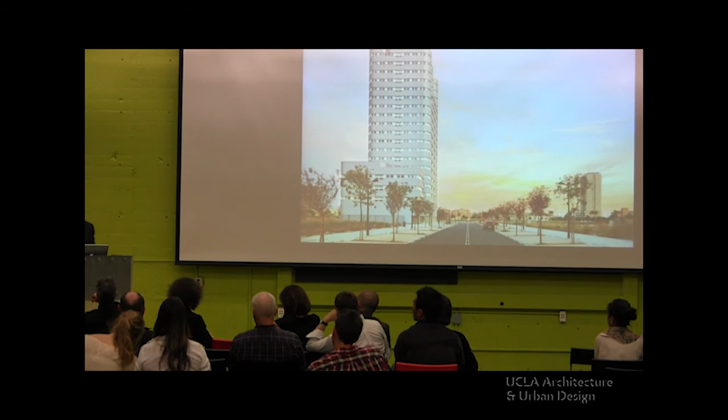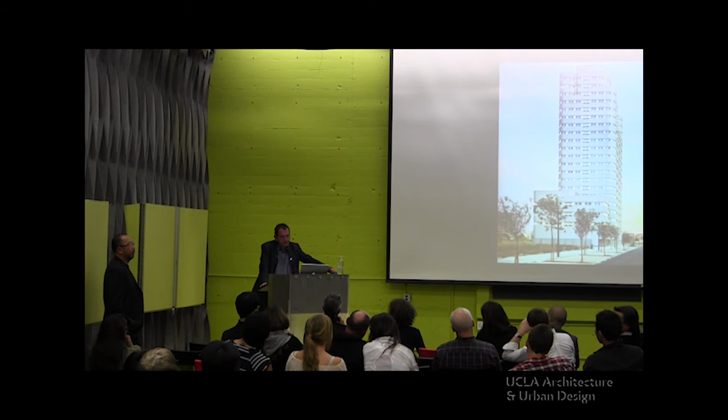With your move, so to speak, or hybridization of the office to the East Coast, what do you think about the ways American education has affected not only education in Europe, but also architects practicing, and maybe the reverse flow? Perhaps talk about this kind of continental practice that may emerge, and to a certain extent maybe even some reflections on the U.S. culture you're going to find yourself immersed in.

To resume, I think that knowledge is critical in this moment in education. I think that when I talk about knowledge, I know about scientific knowledge. I think that the polytechnical tradition is more rich, due to the development of new technologies in every field, and due to the respect that other professionals competing with us in the same territory, like environmental engineers, mechanical engineers, have reached. I think that scientific knowledge has to be delivered more consistently.